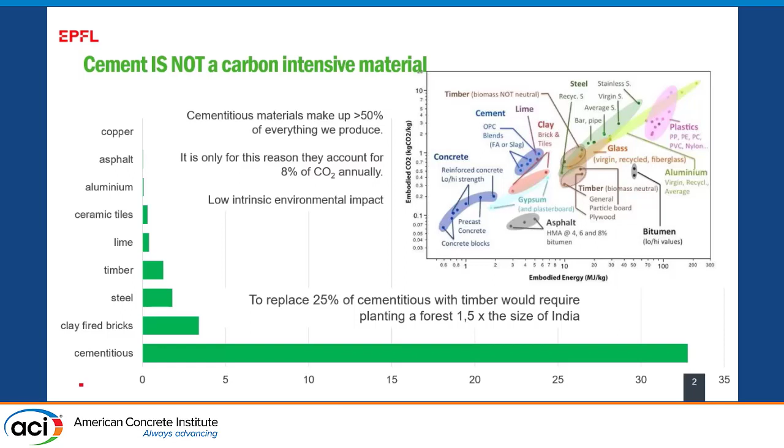We use something like 30 billion tons of cementitious materials like concrete and mortars every year. And you can see in this figure at the top right that from an intrinsic point of view of CO2 per kilogram, they have some of the lowest emissions of all materials. And this is the problem because we already have a low environmental impact and we have low cost, and this means it's really tough to do better.

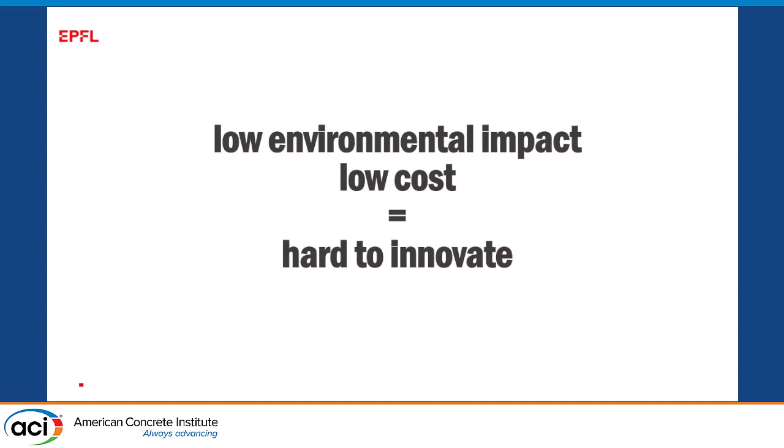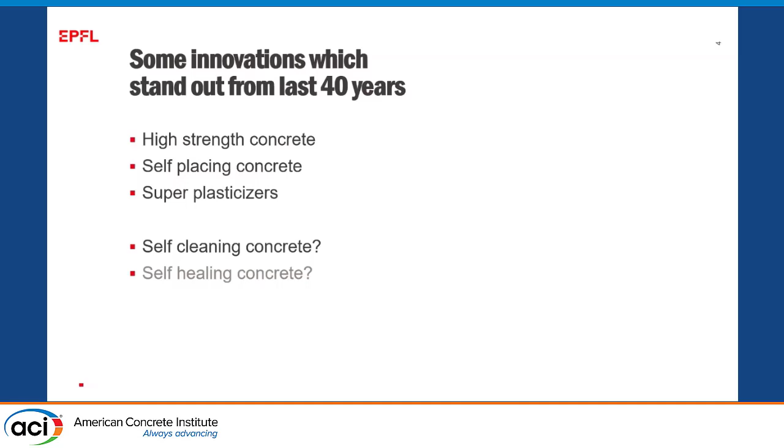So I kind of thought about some innovations which stand out from the last 40 years. We've moved to high-strength concrete. We've moved to self-placing concrete. We've introduced superplasticizers, which is certainly an incredible innovation. Now we see a lot about self-cleaning concrete, self-healing concrete. Do these really make sense? 90% of concrete is still this plain vanilla variety.

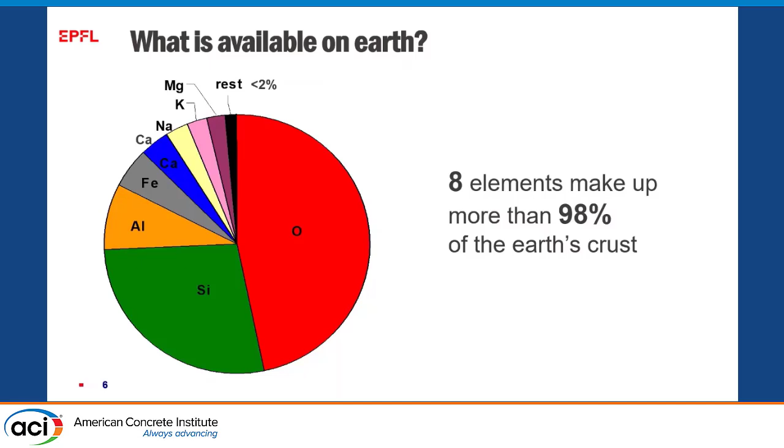So we need to come back and say, well, why do we use this Portland cement? And it basically comes down to the composition of the earth, that just 8 elements make up more than 98%. And then if we look at how these 8 elements work in the context of cement, well, you know, 101, how does cement work? Basically, you have this gray powder floating around in water.

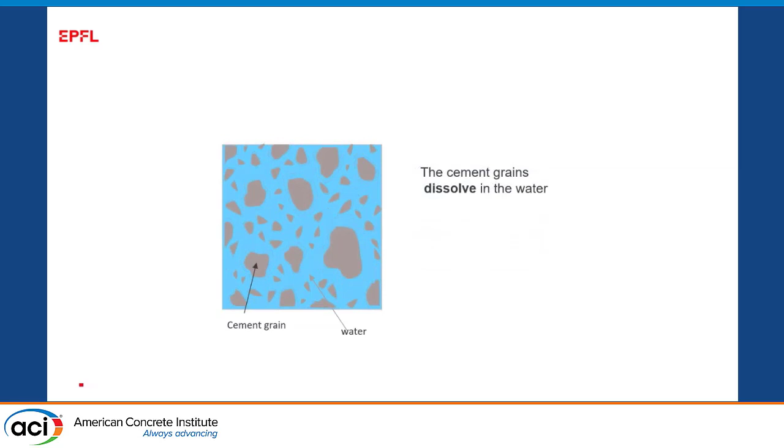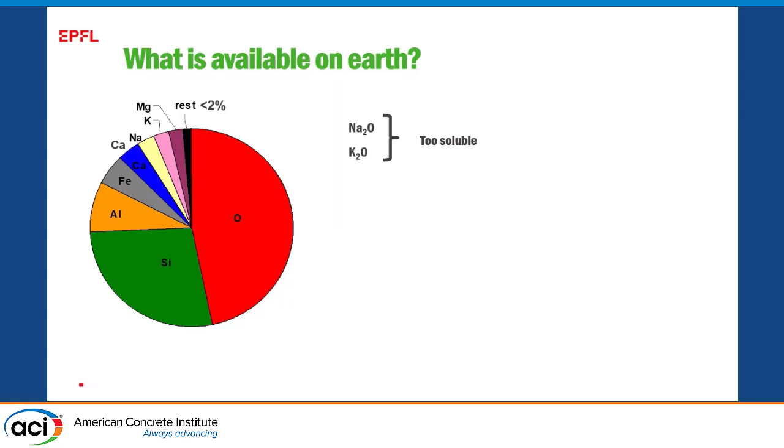And first of all, the grains dissolve like sugar dissolves in your coffee, and then they precipitate these new hydrates. So you need to have a chemistry where you can have this dissolution and this precipitation. So going back to the composition of the earth, we basically see the alkalis are too soluble, the iron and magnesium are too insoluble, so we've got the opposite problem.

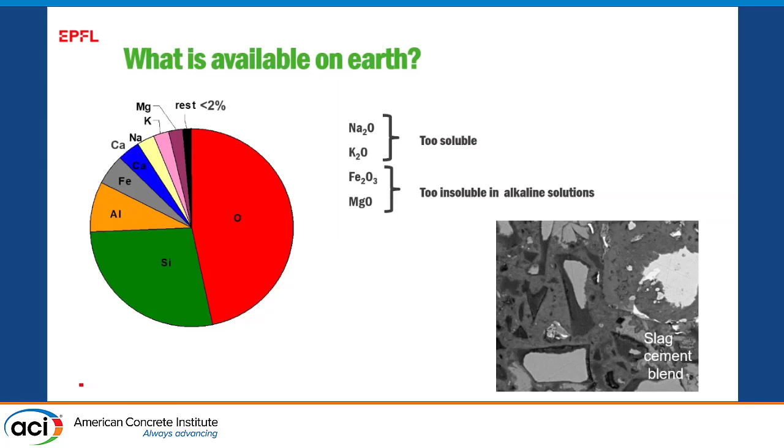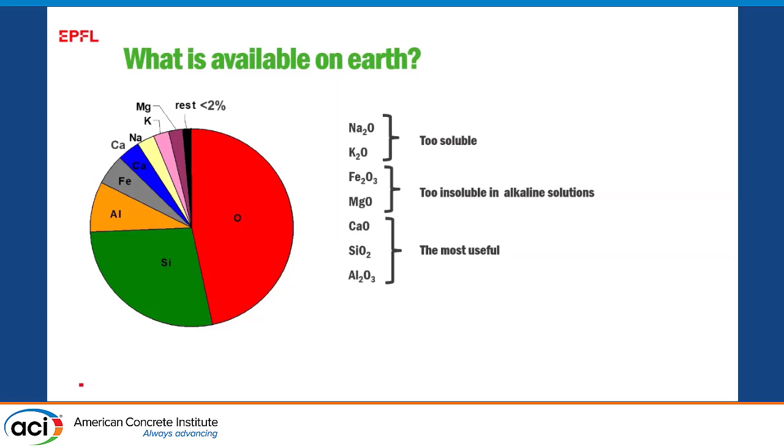It's really important to go through this because so many people out there are convinced there's some other miracle solution that's going to come along and make the problem go away. And then if we come to that diagram, there's basically these 2 regions where we can produce cement. This region we call Portland cement, and this region we call calcium sulfoaluminates. There's been a lot of hype about calcium sulfoaluminates as a way to lower CO2 emissions because they do contain less calcium oxide, and when you're producing from limestone, less calcium oxide is less CO2.

But the problem is you don't just need less calcium, you need a lot higher alumina compared to silica, which means you're confined to using something like bauxite, which is very sparsely distributed, and even if we used all the bauxite we produce today, we would not be able to fulfill much of the cement demand.

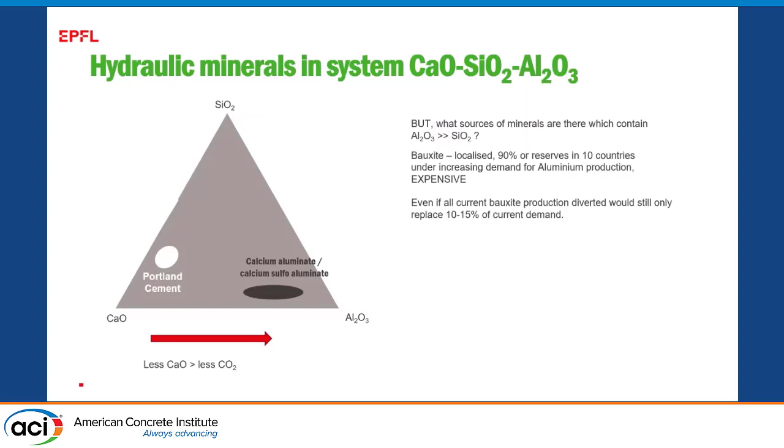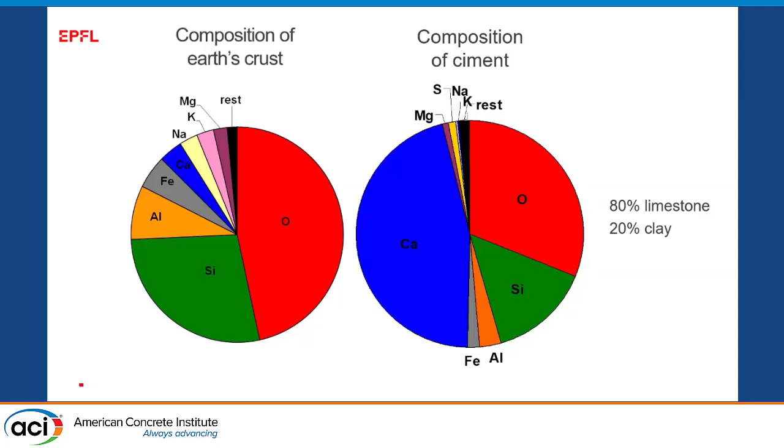So this basically means we're limited to Portland cement, and the big difference we see between the composition of the earth and the composition of Portland cement is this concentration of calcium. And we're very fortunate because nature's sort of done a lot of the work for us of concentrating that calcium in the form of limestone.

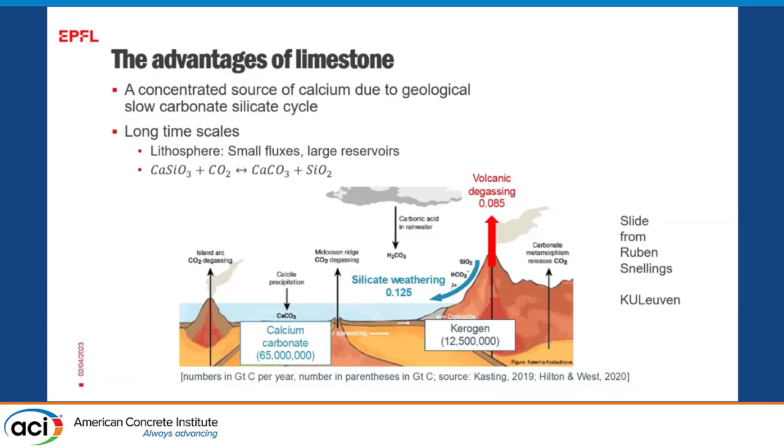So this is what is called the slow carbonate silicate cycle. You get weathering of these common rocks, and then they carbonate in the Earth's atmosphere, picking up CO2. The problem is this is quite a slow process because it does involve the fact that these rocks have all got to dissolve. So the advantages of limestone are a lot, but the problem is, of course, then you get back all the CO2 afterwards.

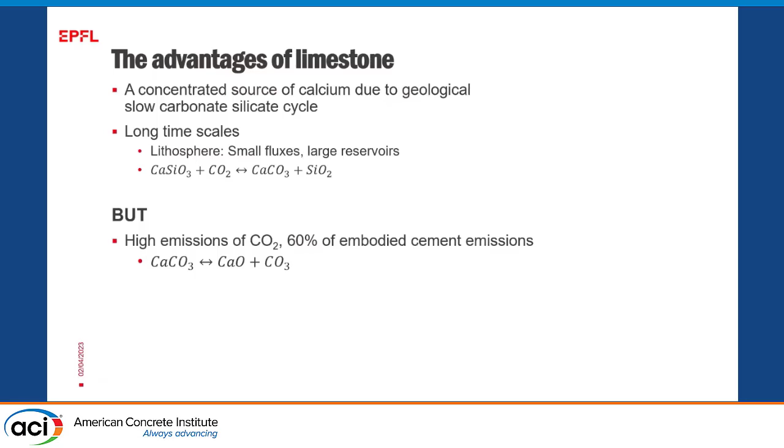And more important than that, we actually face quite a problem in many parts of the world because we have these 2 regions where Portland cement was developed nearly 200 years ago, where we see that the limestone deposits are very nicely interspersed with clay deposits. Now, when we go to places like Africa, we've got a problem because we see these limestone deposits are very sparse.

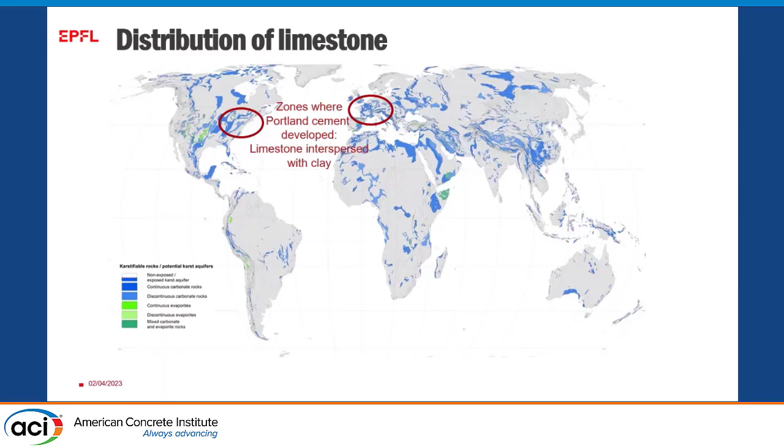And that means many countries in Africa can't produce clinker. They have to import clinker. And that's becoming a big problem because now when we look at how the pattern of cement use is changing, we see this complete transformation which has occurred in my lifetime.

So when I was 2 years old, 98% of cement was used in the global north. Around 1990, we had the advent of development in China, which has led to the fact that China is now producing something like 50% of our cement.

But now that's going down because they're using 3 times as much concrete per person as anybody else in the world. And the other developing countries like India, Latin America, Southeast Asia, and there should be Africa up here - I never know why, I forgot to check it. That should be nicely in red up there, but somehow on this computer it's gone white and blacked out.

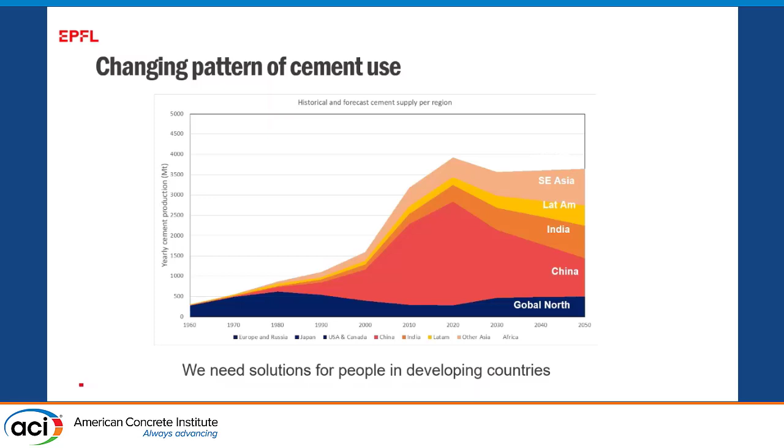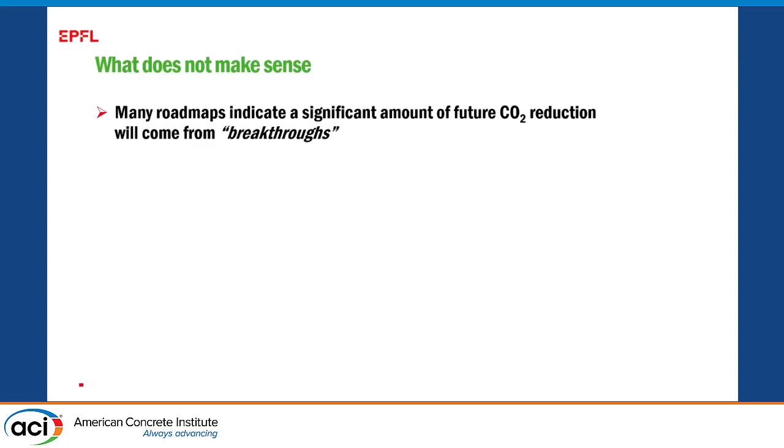That's probably something symbolic that we always forget about Africa. So what can we do about this? Well, there's a lot of things we can do, some of which we've heard today. But I think we need to think a little bit about what doesn't make sense. As I say, if something seems too good to be true, then it probably is too good to be true. Many roadmaps are still saying we have to look for these breakthroughs. But when we consider that cement is a solid material, it has to come from the earth some way or another. And the idea of radical breakthroughs - I hope you now understand, having had this elementary course in earth geology and chemistry - that some of these ideas border on magical thinking or alchemy.

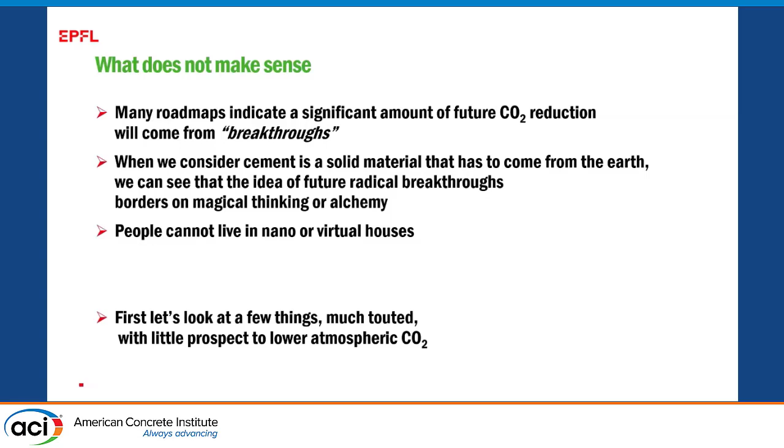And then we can't really shrink our houses. This is another obstacle we have, because a lot of the gains we've made in the efficiency of producing cement has actually been wiped out by people wanting larger houses to live in. There's a lot of startups out there which are trying to deny this basic cycle.

We use limestone to produce cement. It gives off CO2. It then hydrates, gives us all these nice solids, which gives us durable concrete. And it will recarbonate over time, but clearly the amount of CO2 that can be reabsorbed can never exceed the amount of CO2 that was given off.

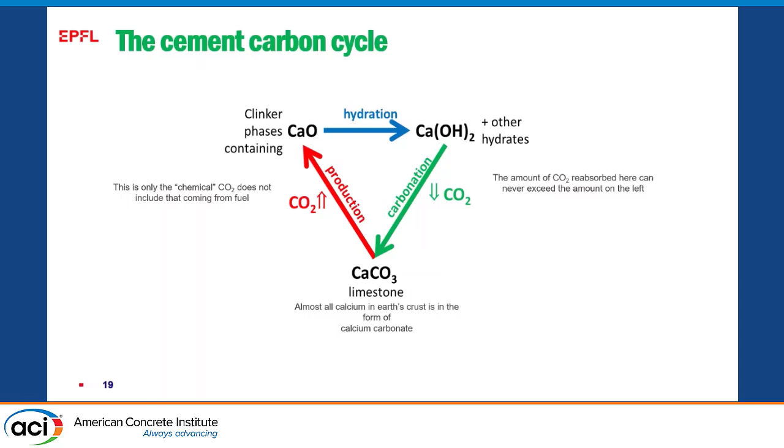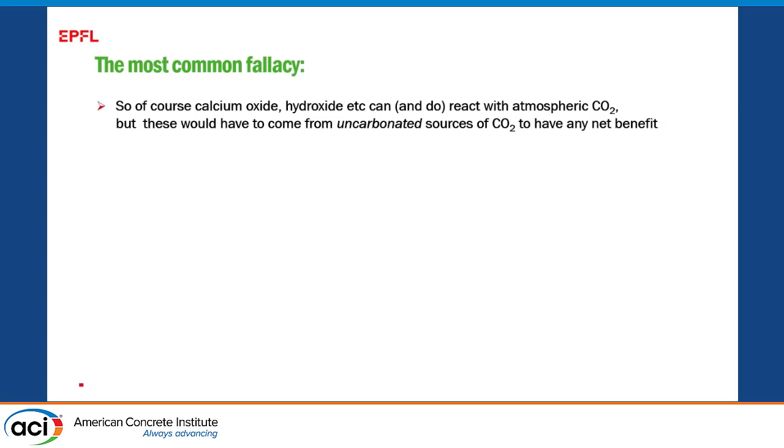So there are a lot of claims that we can add calcium oxide, calcium hydroxide to concrete and it will absorb more CO2. It's kind of true, but only if this calcium oxide or calcium hydroxide came from uncarbonated sources would it have any net benefit. We've just been studying this in detail for the past 2 or 3 years, and the problem is we've got very, very limited amounts of these materials.

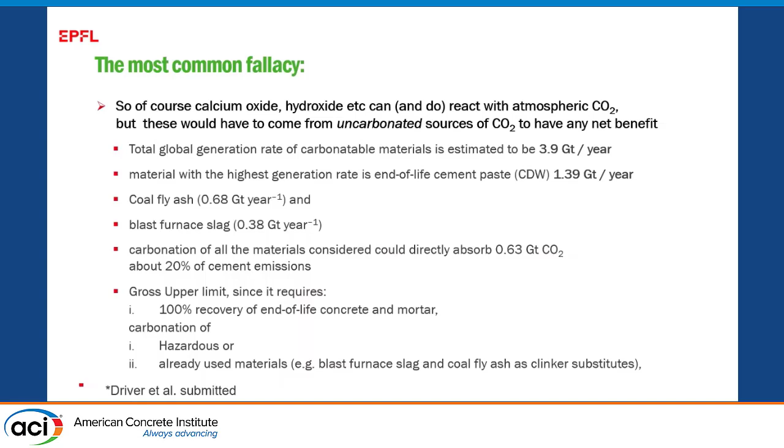These are some of the figures here. I'm sorry I can't show you the much nicer figures, but because the paper's under review, I can't use those yet. Basically the end of the story is: this can contribute, it can be significant - we should recarbonate these materials - but it's going to be a very small amount.

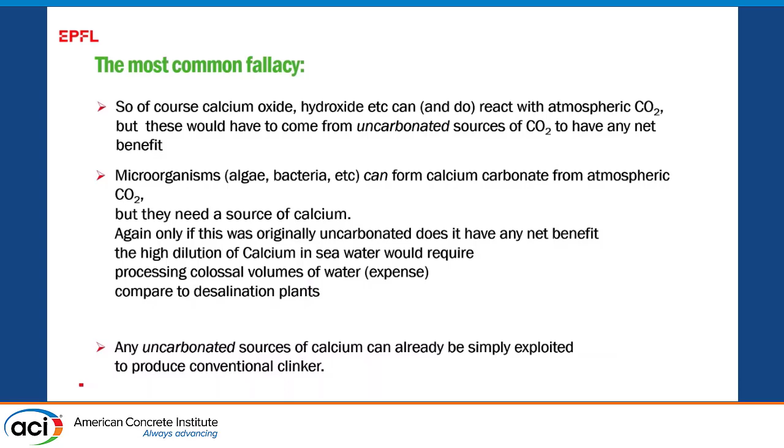And unlike the algae presentation we've just seen, some people say let's use algae to sequester, to make calcium carbonate. And there are algae that can produce calcium carbonate - they made a big contribution to forming limestone in the first place. But again, you've got to give them a source of calcium, and that's what we're lacking. We're lacking sources of uncarbonated calcium.

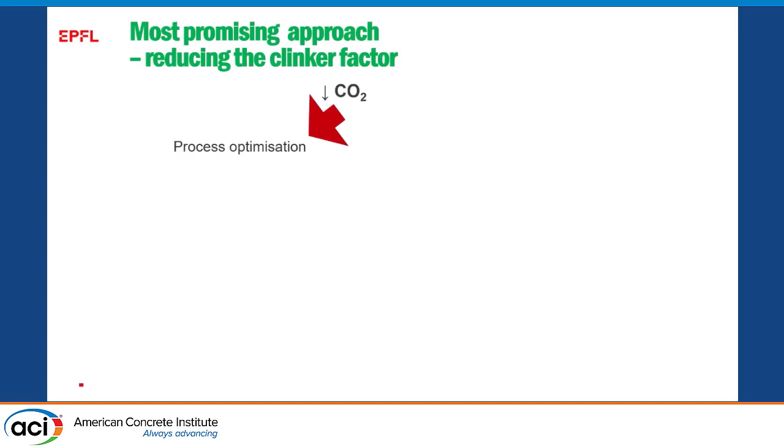So all of this is kind of an introduction to say: there's no great miracle out there, but there's still a lot we can do with the very simple technology of blended cements, or using SCMs in concrete, which we've known for many decades now. We can introduce limestone - this was done 30 years ago in Europe, and it's just being done now in North America. I think you've got to move faster to catch up. We've got to see more ambition here to really bring about CO2 reductions.

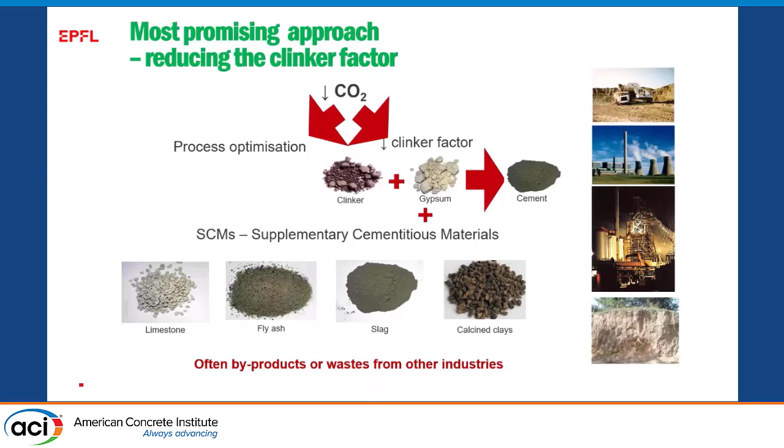And then we have fly ash, but this is horrible stuff that comes from burning coal, which is the number one thing we've got to stop. And slag, which is a very nice SCM, but unfortunately comes from this very CO2-intensive process of producing steel. So what's new? Well, the only thing really that can change this equation are clays, because clays are super abundant, they're available everywhere. And when you calcine them - that's to say, heat them in the range of 800 degrees - they become very reactive materials.

So if you specify in a project to use a high volume of slag, you're just taking slag away from somebody else. Your project may have lower CO2, but somebody else's project has higher CO2. On a worldwide level, we gain absolutely nothing.

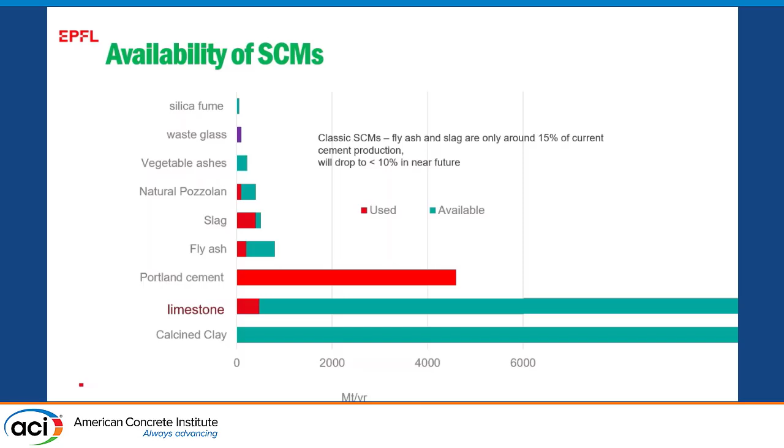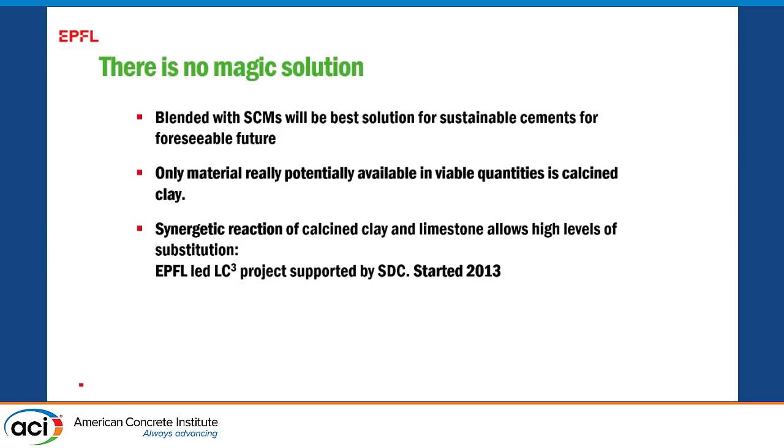So we have a lot of limestone, but we know with Portland limestone cements that above about 15%, we just get a dilution. So the great thing about LC3 was really the discovery we made quite a few years ago now, that we could have a synergetic reaction between the limestone and the clay. And this synergetic reaction allows us to go to high levels of substitution.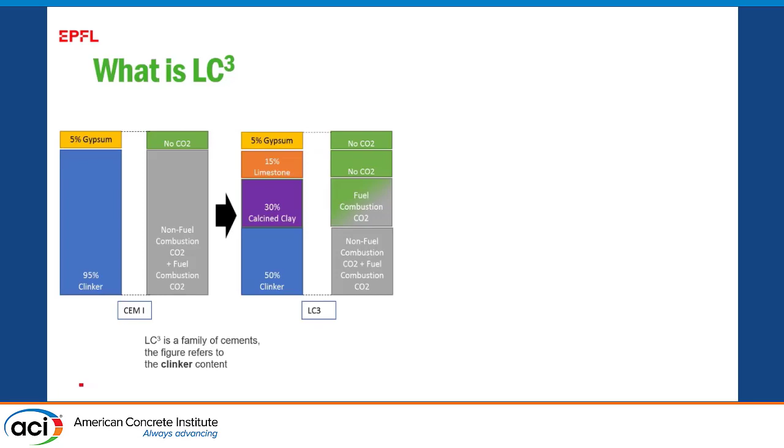So what we're doing here is replacing the more carbon-intensive clinker with a combination of calcined clay and limestone. The limestone has pretty much zero CO2 because it's not been through the cement kiln, and the calcined clay has pretty low CO2 because it's calcined at a much lower temperature and there's no process emissions. But here, even with this 50% substitution, you can get the same performance as Portland cement within 7 days. And that's the secret, because you cannot do this with other SCMs.

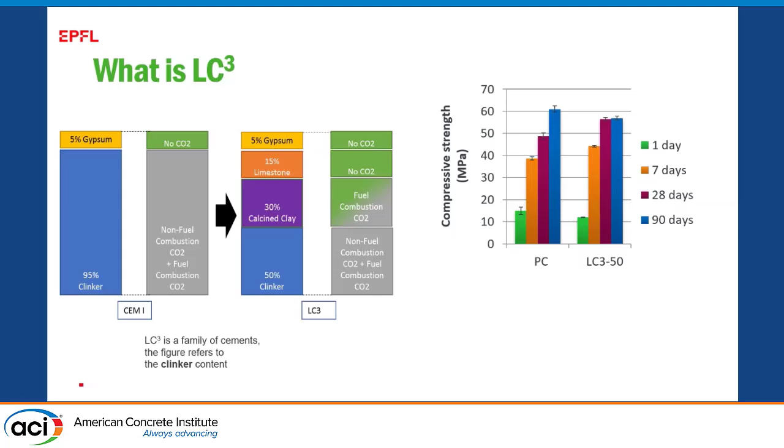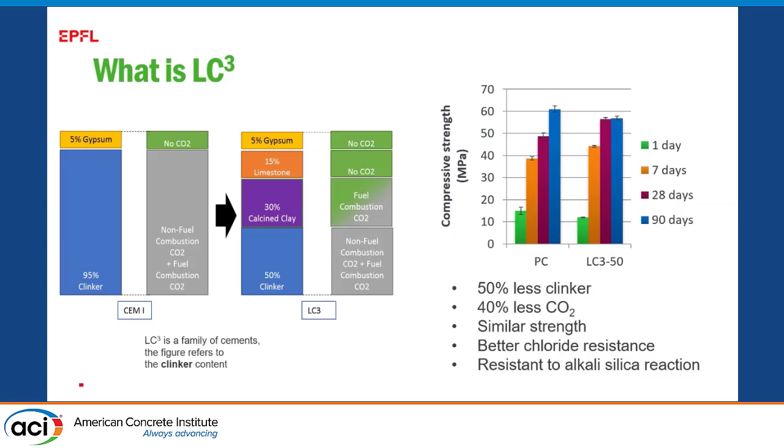Fly ash is maybe catching up at some time after 28 days, but you can't get the same early strength, and that's often a limitation on the substitution level for practical construction. So just to summarize briefly, we've got 50% less clinker, 40% less CO2, similar strength, and some properties like resistance to chloride and alkali silica reaction are very much improved.

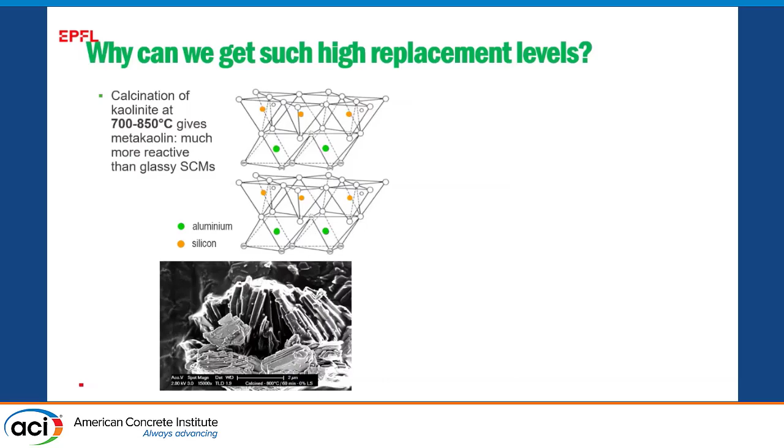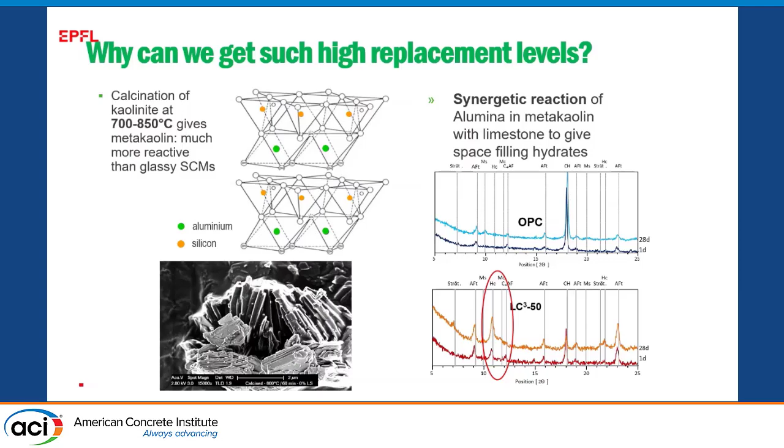Why do we get this synergetic reaction? Because we're using clays that contain some kaolinite, which has this one-to-one layer structure with a layer of silica and a layer of alumina. When you heat it up, this becomes disrupted. Both the silica can react in the pozzolanic reaction, and the alumina can react in this synergetic reaction with limestone to give us these products we call carboaluminate. They're actually there already in Portland limestone cements, but we've got somewhat more of them in these blends.

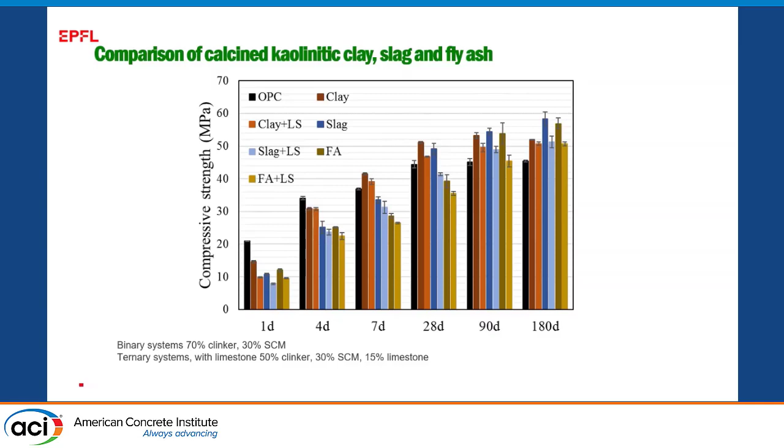Here we can compare the reaction of the calcined clays with slag and fly ash. At long ages, they're all about the same. The issue is that the calcined clays can deliver a lot more early strength, and from a practical construction point of view, this means you can use higher levels of replacement in practice.

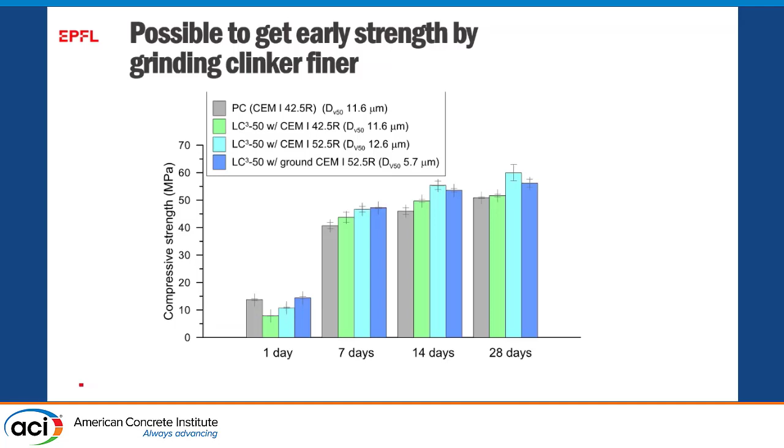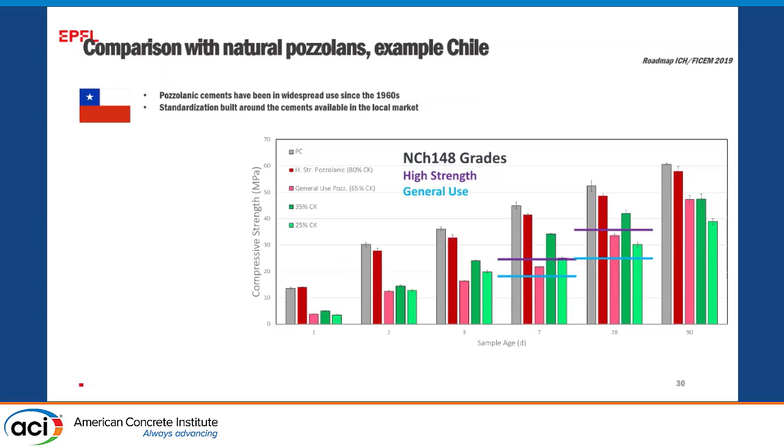If you work on the grinding a bit, you can even get the same strength at 1 day, as we showed in this experiment here, where we just took a cement, reground it, and could get the same strength at 1 day. You've got a lot higher reactivity than things like uncalcined pozzolans. This shows an example of work we did comparing the pozzolan used in Chile, where they have quite a reactive pozzolan.

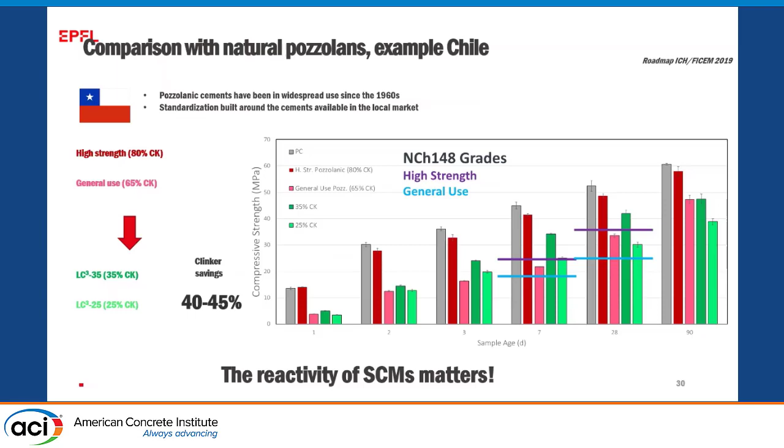We could get the same performance with lower clinker contents, by 40-45%. So things like fly ash and natural pozzolans can do a really good job of controlling things like alkali silica reaction, but it's really difficult to go to these high replacement levels you need to save CO2.

So we do need kaolin in the clay, but these kaolinitic clays are very widely distributed. Everywhere you can see this kind of orangey color, you will have kaolinitic clays, and nicely they're really available in those countries where we need them to address this growth in demand for cement.

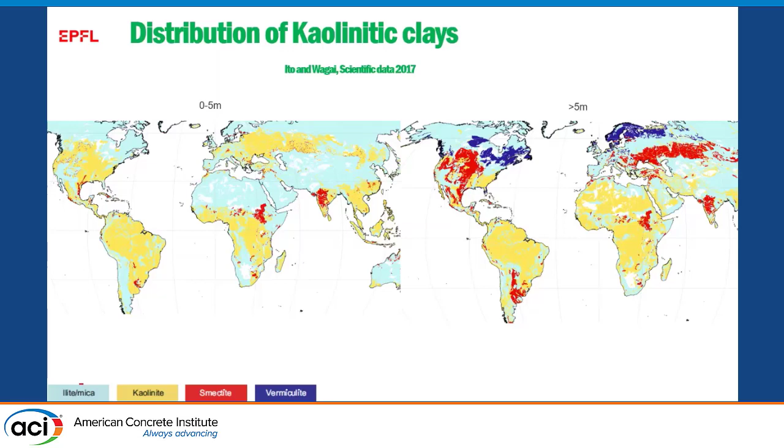Honestly, the issue of cement is not in North America or in Europe. It's in these countries where the growth is going to occur, and we need to get technologies that can be used there before these buildings have been built. After the buildings have been built, well, all the CO2 has been emitted.

We can measure the kaolin very easily by looking at the weight loss between 400 and 800. We see it correlates really clearly with the strength development, and the red bars show the reference for the reference Portland cement. So at 7 and 28 days, we can get the same strength as the reference Portland cement with kaolinitic contents of around 30, 40, 50%, which are not used in other applications.

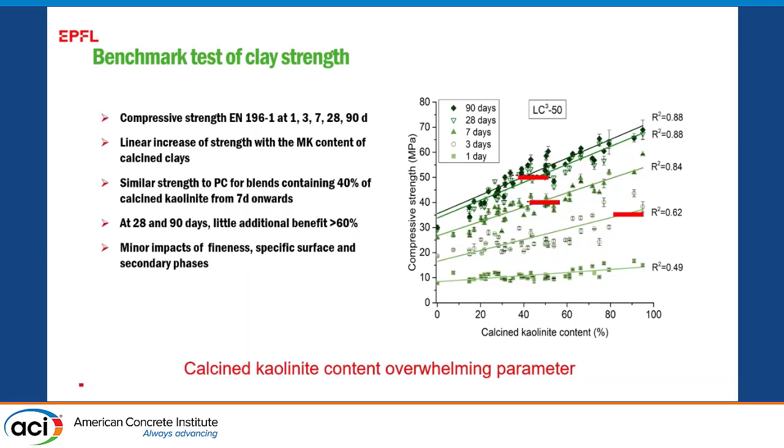People are often confusing the fact that we're talking about kaolinitic clays with metakaolin, which is a very expensive product and is used in many other applications. But often the kind of clays we can use in LC3 are found as waste from those other industries, because the grading, the content of kaolinite is too low for those applications.

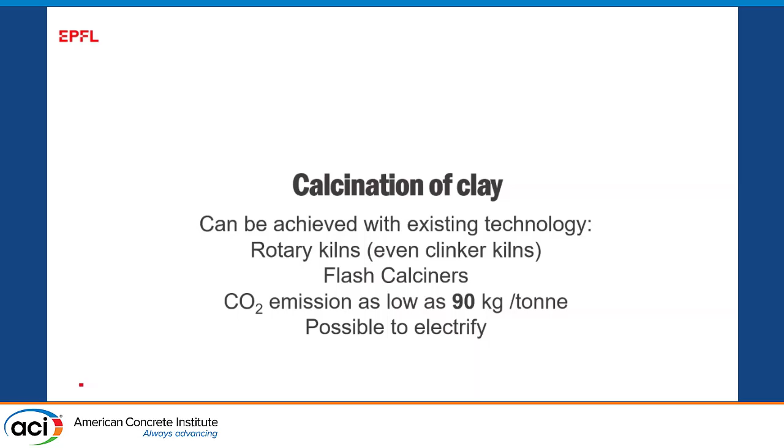We've got existing technologies ready to go today, which can do the calcination with emissions as low as 90 kilograms per ton. So that's about 1/10 of the emissions of clinker. And we've taken this to full scale, built houses out of it.

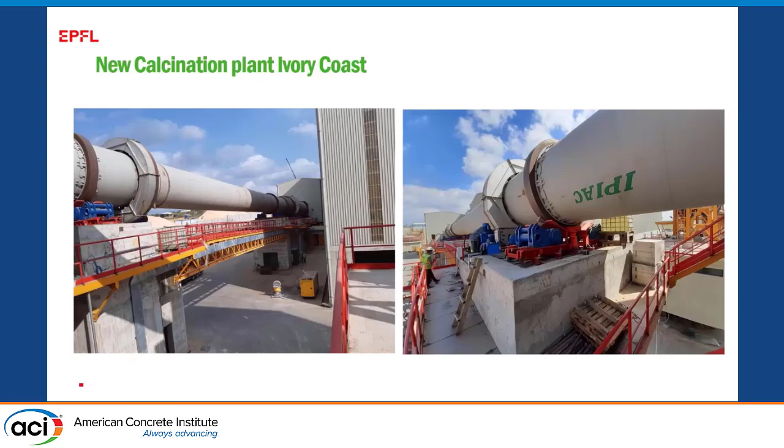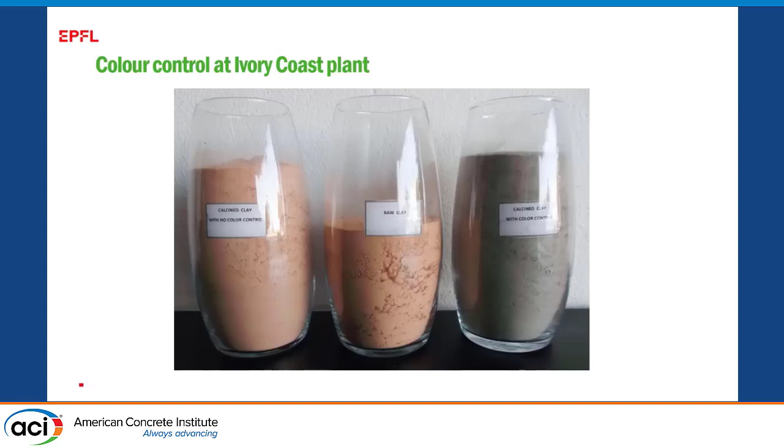There's already existing plants, such as this one in the Ivory Coast. And the importance of this one in the Ivory Coast was to demonstrate that you can control the color. Because many people say, well, people aren't going to buy red concretes. Well, if they don't want to buy red concretes, they don't have to, because as you see on the right here, you can turn the color gray with a very simple technology existing from the brick industry.

In terms of chloride resistance, it's much, much better. The black line is the reference Portland cement. The red are the mixtures with slag, which are better. The blue are the ones with fly ash, which are better still. But the purple ones at the left show you the dramatic reduction of chloride penetration you get with these materials. You have chloride penetration diffusion coefficients about 10 times less than the Portland cement.

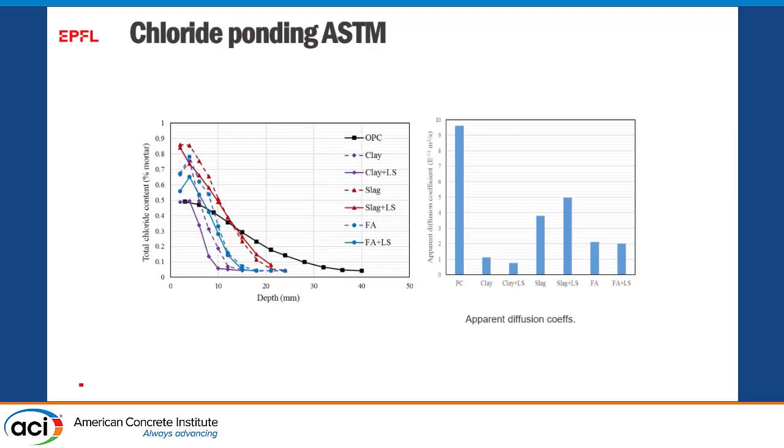Well, of course, if we use FRP rebar, we don't need to worry about that. But, if that's hopefully going to advance fast, in the meantime, this can be very good for marine environments.

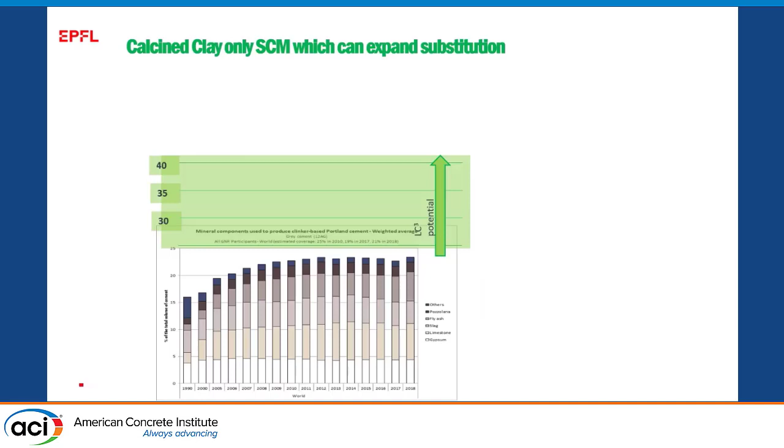These figures are global figures. Most of the rest of the world already uses blended cements. I know in North America you like to add them at the concrete stage, but it's basically the same thing. Now, if you remove this limitation, you can certainly imagine going to a substitution level of 40% quite easily, which would represent about 400 million tons of CO2 per year.

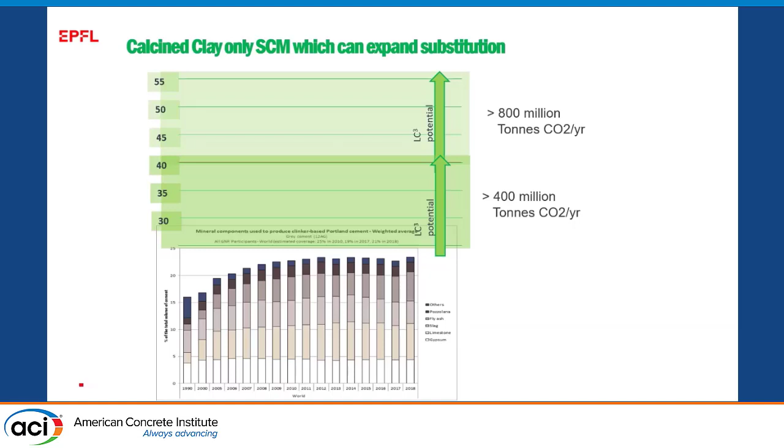But if we're thinking 2050, which is where we've got to be, you can at least double that, because we are already exploring ways to go to higher clinker substitutions, which can come to something like 800 million tons of CO2 a year. And the good news is this can all be done even more cheaply than producing Portland cement.

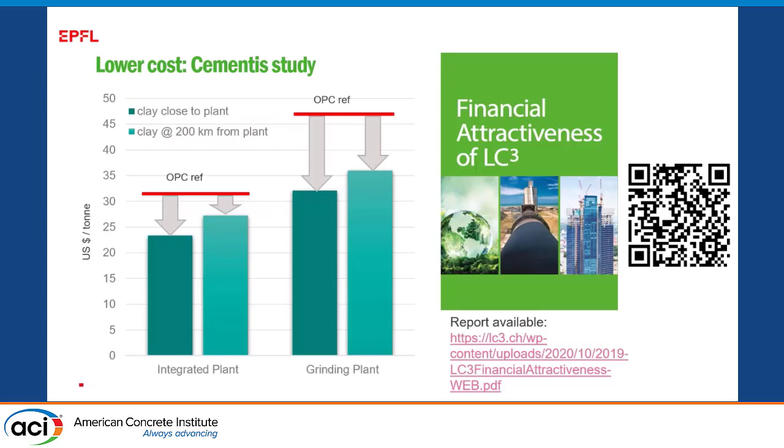So the presentation from Brimstone said they aim to produce cement on the market at the same cost. Having read their patent, I would say good luck to them. But this here we can really show today is a technology where you can produce cement more cheaply. And I'm very pleased to say that it's now being taken up in all these countries around the world.

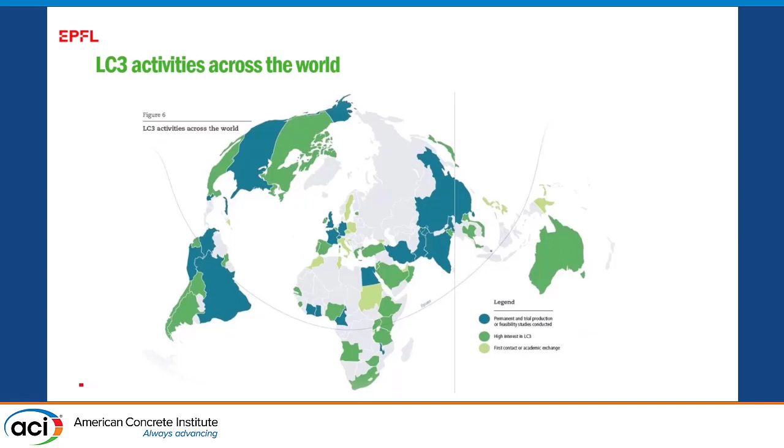So here we come to the crunch. What's the blockage? I mean, this is the problem. People say we've got no time to do anything new. Making money in the cement business is having a kiln that operates 24 hours a day, something like 320 days per year. You don't have time to do trials, and the bonus of the person operating the cement plant does not depend on innovation. It depends on getting the product out the door.

And this is one of the main obstacles. There's a real lack of ambition. We had a meeting on Friday, and one of the major cement producers said, well, we don't have to pay anything for CO2 in the US at the minute. Well, maybe you don't at the minute, but I think that's going to change quite fast. So I think you should start preparing for it.

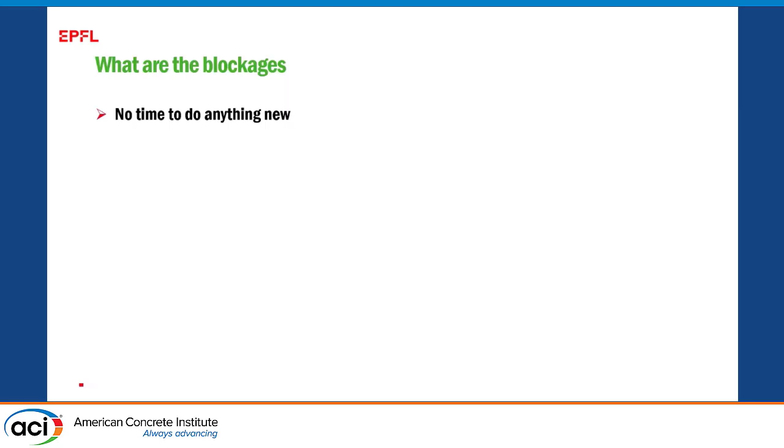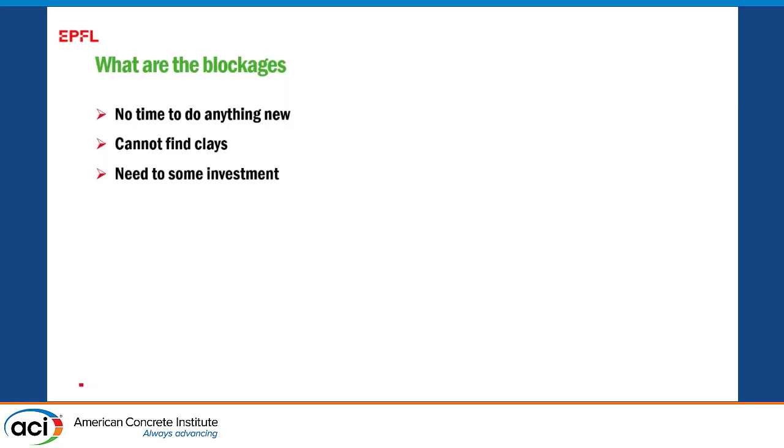And then again, it's a question of lack of awareness, because thinking about these developing countries, particularly in those parts of the world, the largest companies make up only a small part of the market. And then we have, of course, our favorite codes and standards.

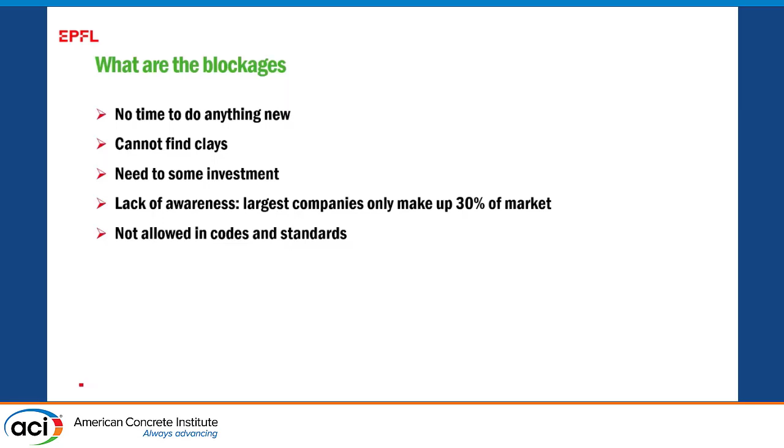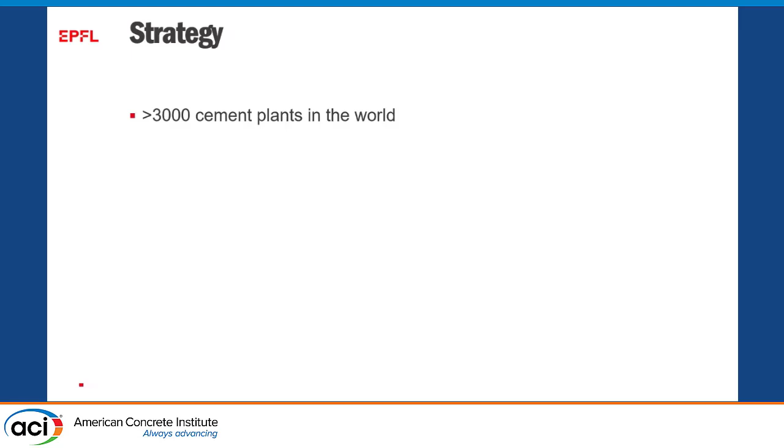So our strategy has really been the following. We decided not to try and make a commercial venture out of this, because what we wanted to do was get this technology into as many of the 3,000 plants around the world as we could. And the majors only own about 30% of these outside China.

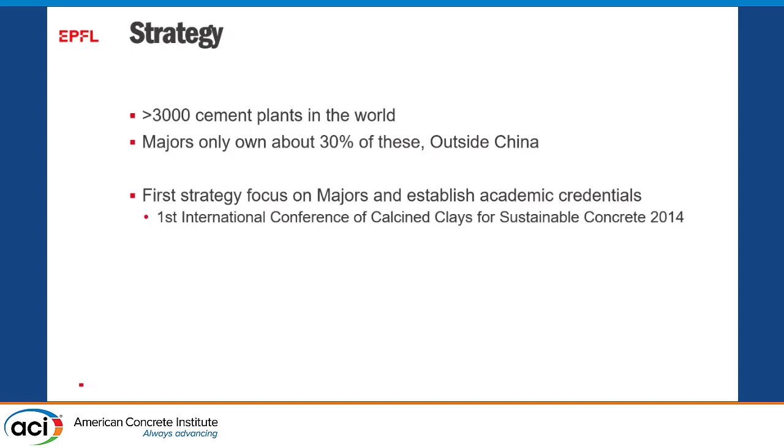So we did focus first on the majors, because if you can convince a big producer, then they've got maybe hundreds or even several hundred cement plants around the world, and then you can have a multiplication effect. We also worked on the academic side, convincing academia this was a sound product.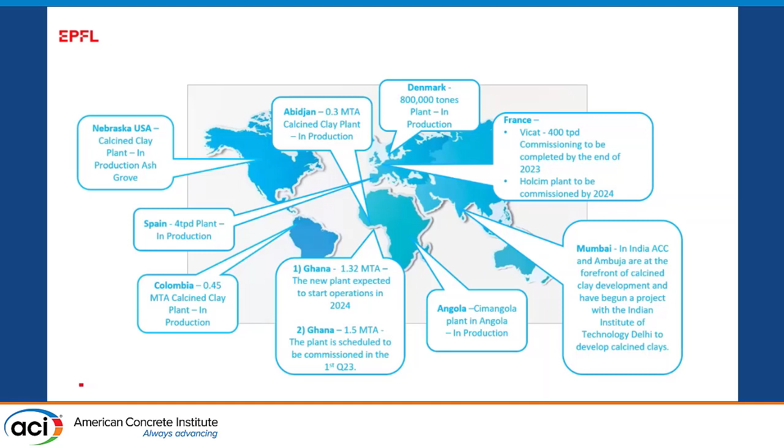And now I'm very pleased to say this is a snapshot of the publicly announced plants that are already being produced or already producing. There's many, many more that are not publicly announced.

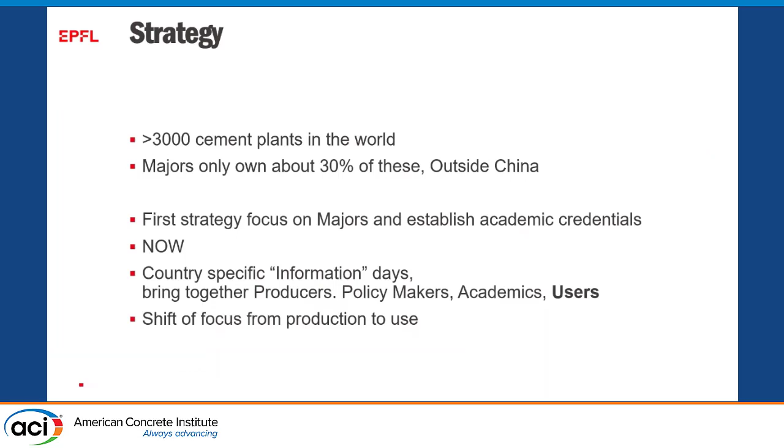So where do we go now? Well, what we need to do now is shift to the use stage. So we have now some examples of people who have accepted to use LC3 in big buildings. This is now the challenge.

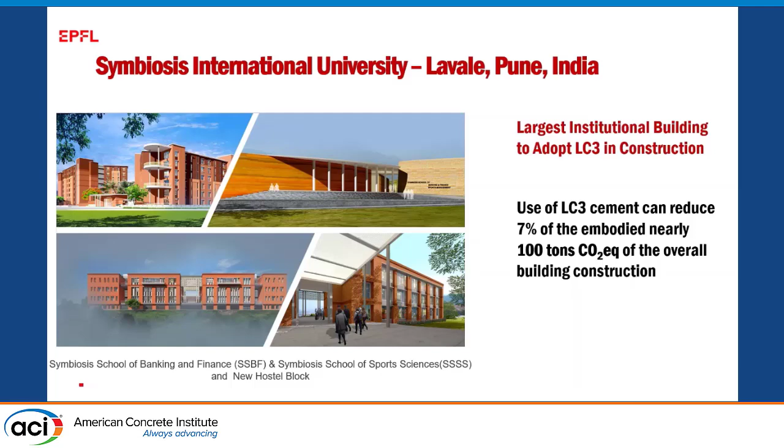We're talking about a blended cement, so the performance is really identical to cements based on slag and fly ash we've already been using for several decades. And of course, we have to realize this is only one part of the puzzle. We have to not only reduce the clinker in cement, reduce the cement in the concrete, reduce the concrete in the buildings, and use our buildings more efficiently.

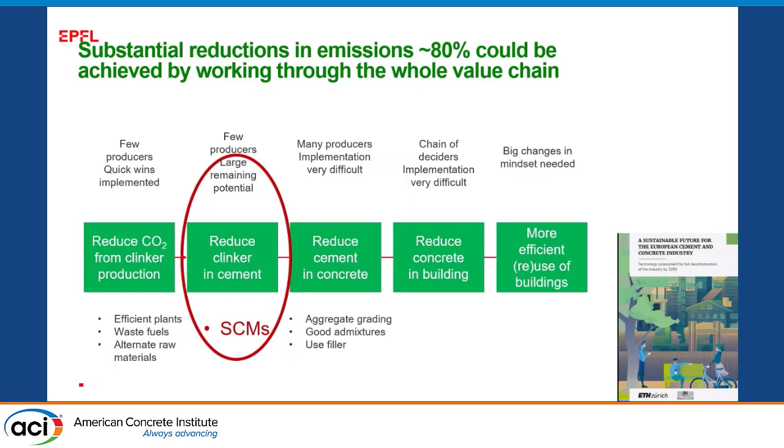Because the kind of pattern we're seeing, these are the same levers that one of the other people showed. We can do all these things at the top. We can have all this reduction at comparatively low cost, or even negative cost.

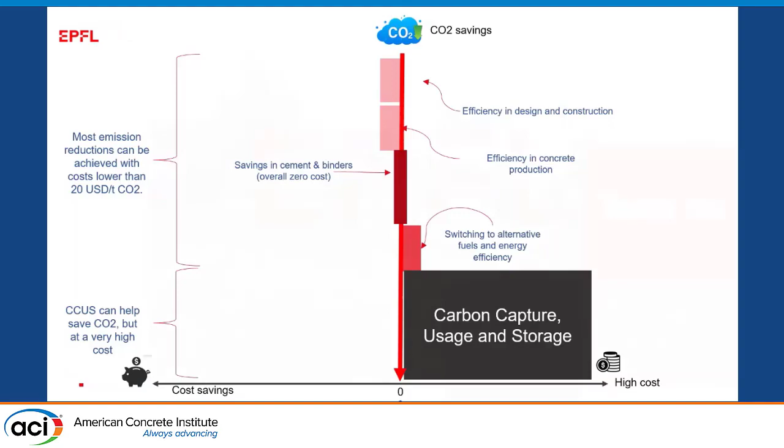At the end of the day, we've got a small amount that's going to have to be dealt with by carbon capture and storage, but our interest is really to minimize that amount, because that is going to be the expensive step. So with that, I'd like to thank you for your attention and hope maybe we have still a bit of time for questions.